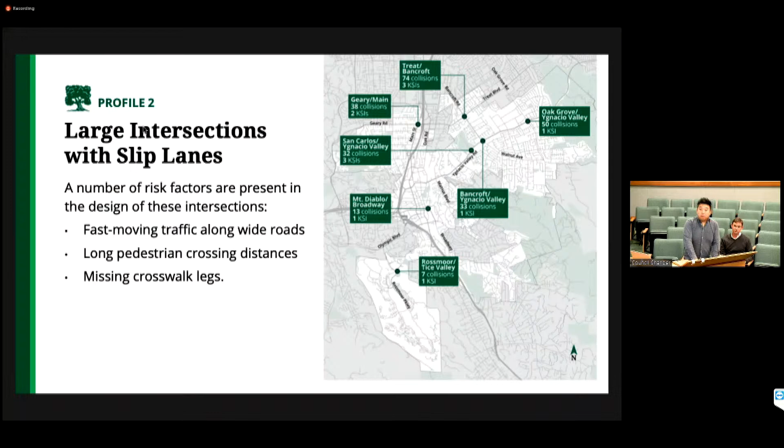With the solutions, you're really looking beyond just closing that slip lane—you're also looking at other ways to slow traffic down at these intersections, using certain ways to reduce crossing distance, break it up into multiple chunks, and also just make pedestrians more visible.

Profile number 3 is speeding along large roadways, and this is just looking at vehicular crashes. You have a lot of really wide roadways in Walnut Creek, and the wider a roadway is, the more conducive it is to a vehicle moving at higher speeds, and that can sometimes happen even despite the presence of a lower speed limit.

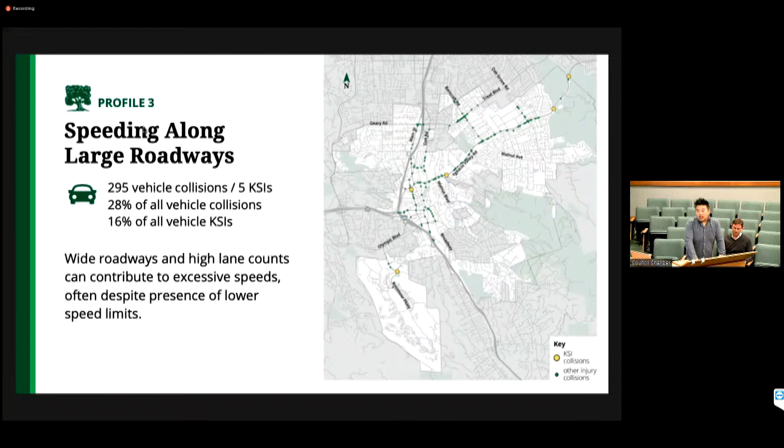When you look at roadway design, there are certain things you can do to design a roadway so that drivers intuitively understand it's a lower speed limit area—introducing features that really prioritize safety and going at the correct speed rather than maximizing throughput at all times.

Profile number 4 is large roadways around downtown. Walnut Creek has a very vibrant downtown as a regional destination, so you have a lot of vehicles, a lot of pedestrians, and a fair amount of bicyclists. When you have all of that mixing together in this small space, but you also have large roadways that look a lot like what they look like outside of downtown, you create a lot of potential for risk as all of these modes mix together.

You can see a sizable chunk of all injury collisions, especially a large chunk of pedestrian collisions, happening along these multi-lane corridors in downtown. Really, they're out of place in many respects when you have something very wide and moving very fast through a pedestrian-oriented area.

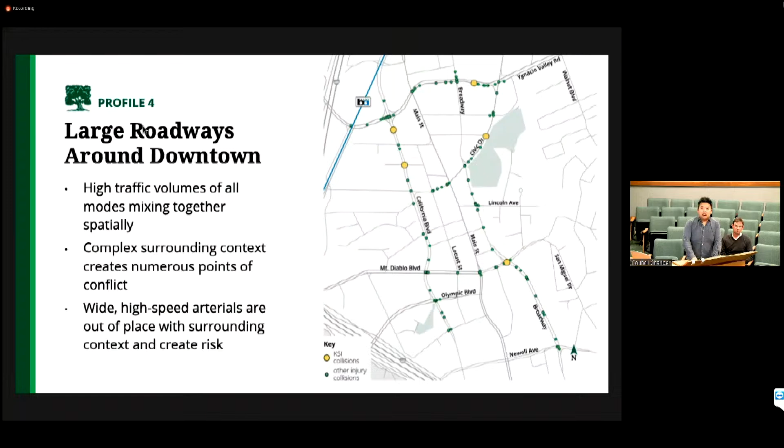These countermeasures really aim to slow traffic moving through downtown and add redundancy—again, it's about making that design more forgiving. You can see some of these have already been implemented around downtown in recent years.

Intersections with permissive left signals. We all know left turns are the most conflict-prone movement in an intersection, so when you have a permissive left, there's a lot of room for error.

People might be confused about when they have right-of-way, when they can proceed. As the city continues to grow and traffic volumes continue to increase, that's when you need to consider replacing that permissive left with a protected left.

There are obviously other ways you can really reduce risk at intersections.

Profile number 6 is red light running. You can see a pretty sizable chunk of collisions as well.

This, again, is something that's more behavioral, more enforcement and education oriented, but it can still be supplemented with certain engineering countermeasures to make the roadways more forgiving. For example, larger warning signs with fluorescent sheeting can still add some safety into the roadway.

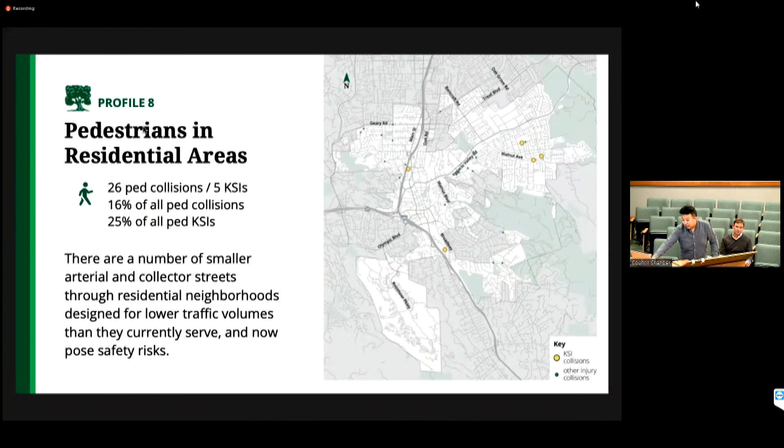For example, you might have roadways that aren't striped, crosswalks that aren't striped, or signage now obscured by plants because the right-of-way isn't kept clear of obstructions as often as needed. Maybe things need to be signalized, maybe there need to be stop signs or sidewalks. Really, we're looking systemically at these lower-trafficked streets and collector roads in residential areas that might be missing safety features that now come standard when you build something new.

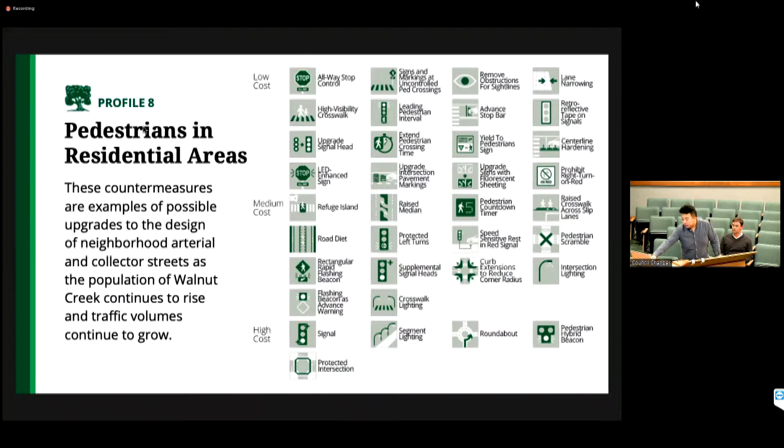We have one bicycle-exclusive profile: bicycles along our wide roadways. A lot of the same problems we discussed with speeding and large intersections apply here—there are many large roadways in Walnut Creek without appropriate bike facilities. That means either no bike facilities at all, or a Class 2 bike lane, which is just painted on with nothing separating the bicyclist from general traffic. At intersections, those bike lanes are designed so the bicyclist has to weave into traffic, creating conflicts with vehicles turning right. That traffic mixing, and having two modes moving at very different speeds without separation, is a hazard.

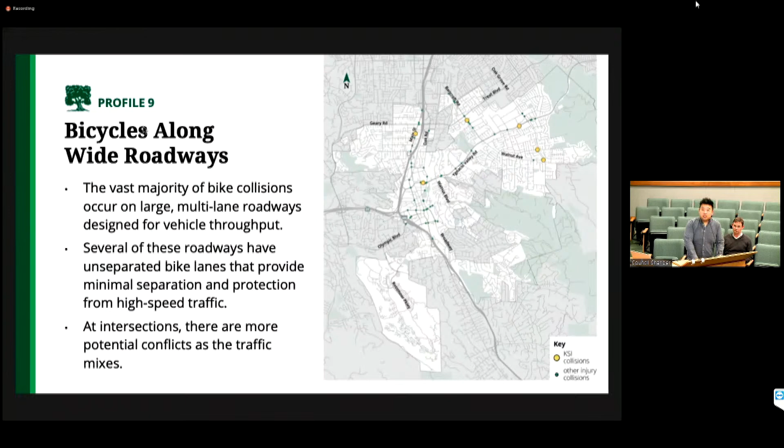The best solution here is additional and improved bike facilities, but also improvements to intersections to clearly delineate where the bike is going to be, and creating roadway design that allows traffic to go slower at the intended speed.

Finally, we decided to separate out Rossmoor as a special area for analysis, just because of the unique demographics and features of that community.

This is what we're calling right-of-way violations. In this bucket are signals and signs violations—so if someone doesn't stop for a stop sign, that's a signals and signs violation. You have vehicle right-of-way violations when one vehicle takes right-of-way when they didn't have it, pedestrian right-of-way violations when a vehicle violates a pedestrian's right-of-way, and improper turning violations. All of those we grouped into one bucket—think of it as vehicles going when it's not their right-of-way to go.

With all of these, it's a violation in the sense that one vehicle was in the wrong, but it's important to remember we're not dealing with traffic tickets here—we're dealing with injury-causing collisions. Going back to shared responsibility, it might be someone's fault for insurance purposes, but the solution is about making the design more forgiving in general. It might be someone specific's fault, but it's really about building in redundancy for the safety of all parties involved.

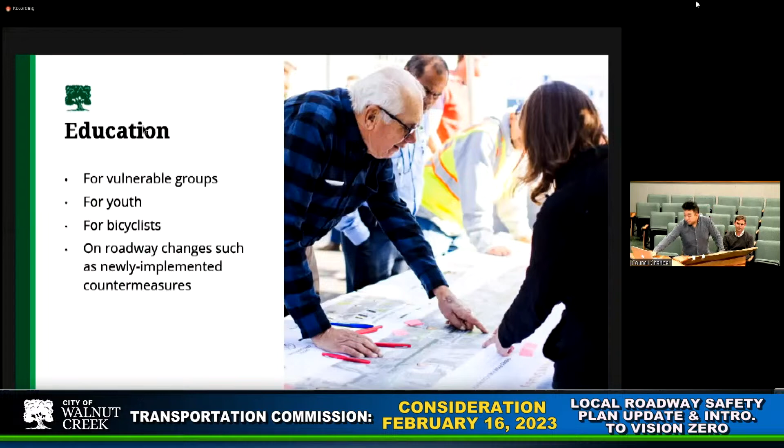Enforcement—over the course of the development of this plan, the PD has been a major stakeholder participating in our outreach and giving us feedback on our ongoing analysis and planning efforts. Enforcement can be informed by the findings of this plan, so you can target specific locations, times, or contexts for enforcement, with high visibility enforcement tied to those contexts to really drive messages home.

We've also initiated a conversation about whether automated enforcement might be appropriate. Obviously there are a lot of caveats to that, and no decision is made now, nor will be as part of this plan, but it's just an idea to explore.

Obviously, all of these need to be considered with an equity lens. So, for example, if you're talking about automated enforcement, how do you make sure that it's really for the sake of safety as opposed to punitive revenue collection?

There's policy changes to keep in mind. One of them is AB 43, which has been passed by the legislature and signed by the governor. The effects won't fully kick in until 2024, but basically it allows local jurisdictions more leeway in setting their speed limit rather than being bound by the 85th percentile.

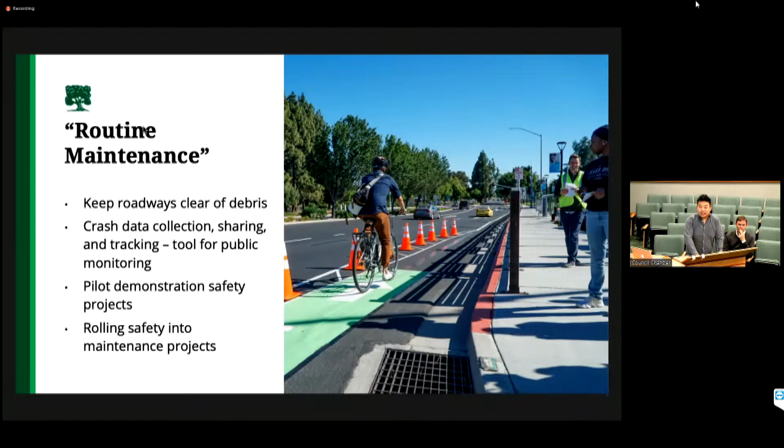And we have another opportunity to pause. Any questions from what we just heard?

Youth Member Yao: Yeah, so you mentioned education. Can you give a more detailed explanation on how you plan to educate people, especially the youth?

I think first and foremost, those slides can be seen like the library of countermeasures that you saw that accompanied each profile. So it's not committing the city to doing all of them, and it's not saying we should do all of them at all times. It's really doing them on an appropriate, as-needed, and context-sensitive basis, the same way you would put in, for example, a roadway improvement.

With that said, an example of where an education program for youth or school-age children might be a good application would be, suppose there's a safety improvement put in near a school, and you might want to have a person from the city come in and talk to the kids about, hey, what is this new crosswalk that we put in? How do we operate the beacon that comes with this crosswalk?

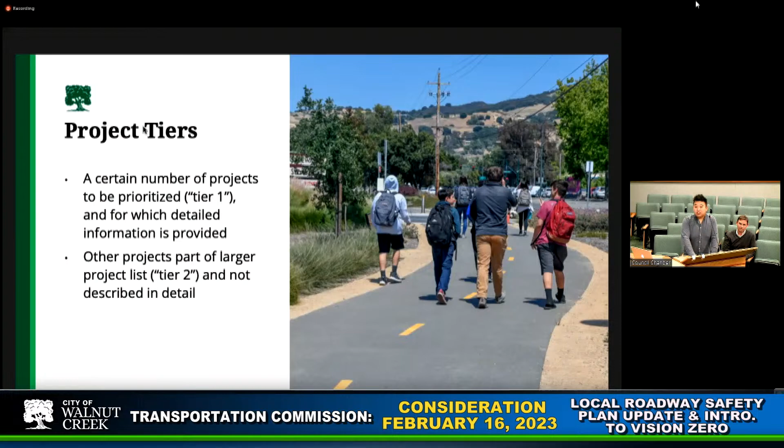So with that, I'll talk about some candidates for potential transformation into a project. The first thing is a map of intersections around the city with slip lanes, shown with dark green and light green dots. The dark green dots are from profile number 2 - intersections with slip lanes that are large, four lanes or more across on both intersecting roadways. The lighter green dots are other intersections around the city that also have slip lanes.

These are candidates for slip lane removal, but also candidates for reconfiguration, adding bulb-outs and median refuges to other parts of the intersection. So maybe you keep the slip lane, but add safety improvements elsewhere to compensate, adding missing crosswalk legs and other intersection improvements as context appropriate.

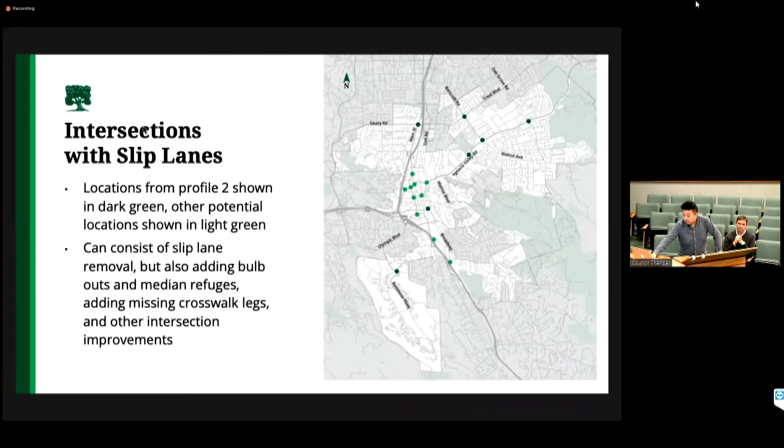The second map shows some of the largest roadways in the city outside of the downtown core area. These are your largest major corridors, where you can address issues like bikes not having proper bicycle facilities that are more protected from vehicular traffic moving at fast speeds.

That also goes to the point earlier about creating facilities that might induce more travel in other modes - if you create less stressful facilities, people might see biking or walking as a more viable option when they feel the places they'll be doing it in are safe. These are also corridors for safety enhancements to uncontrolled pedestrian crossings.

Obviously they're wide and fast moving, so these are especially places where, without a dedicated signal, a pedestrian might feel very uncomfortable to cross. These are corridors where uncontrolled pedestrian crossings are due for enhancement. That goes to the systemic nature of this process - we know not every uncontrolled crossing along these corridors will have a collision history, but we also know these are locations with safety concerns.

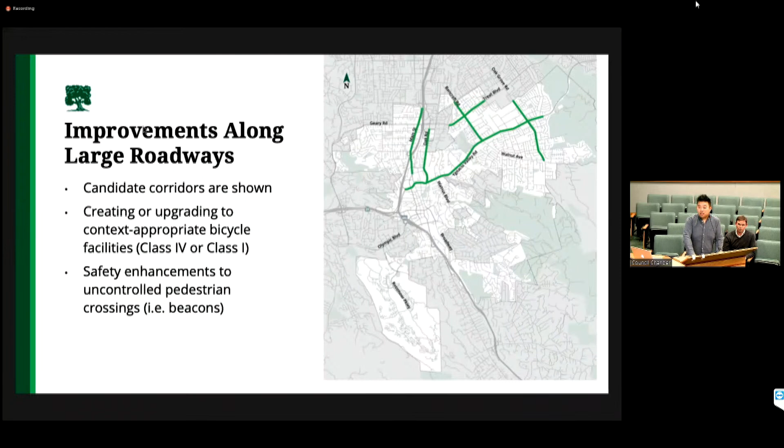Then I want to zoom in the map to just the area around downtown. These are some of the larger corridors around downtown, and what we're talking about are different options for how to reconfigure and optimize the lane configurations of these roadways.

For example, on California, it might be providing bike facilities on that very wide right-of-way that are an upgrade over what the existing Class 2s can do for bicyclists. It might be looking at North Broadway for a road diet that turns underutilized roadway capacity into something more productive.

For example, making calming traffic speeds, or potentially providing bike facilities, and also intersection improvements to make these streets function less as barriers.

If you think about some of the larger intersections in and around downtown, an intersection like Civic and Broadway, even though it's right in the heart of downtown, can seem pretty intimidating for a pedestrian to cross because of how long the crossing distance is and how many lanes of traffic you have to get across. We have several of those corridors going right through downtown, and that divides downtown into smaller areas where travel between them seems more daunting than it has to be.

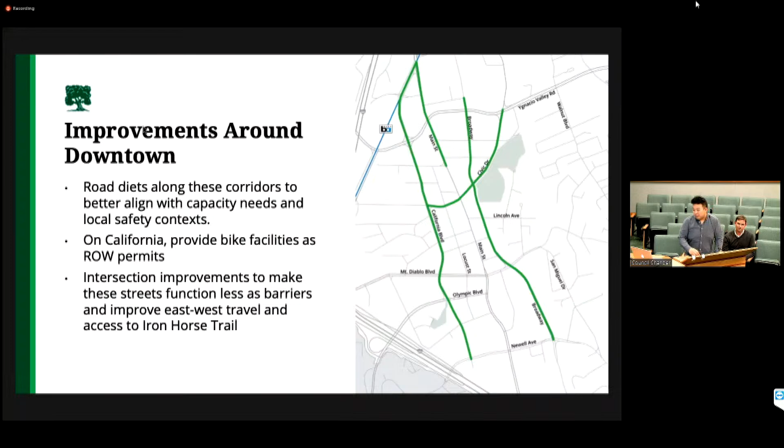So those are some of the candidate corridors in downtown for any or all of these improvements. And then finally, here are some miscellaneous improvements that more or less align with the pedestrians in residential areas profile, but are not limited to just pedestrian improvements.

So obviously there's the Newell Avenue project that the city has previously studied, and this is now also on CCTA's radar as a potential component of a wider Olympic Boulevard project that is multi-jurisdictional. There's Walnut Avenue, a section near where the CC Canal Trail crosses it, improving crossings there, both for the canal trail and other pedestrian crossings along that section. And then you have Montego right off Ignacio Valley, reconfiguring a very wide roadway that is significantly wider than the capacity it's serving.

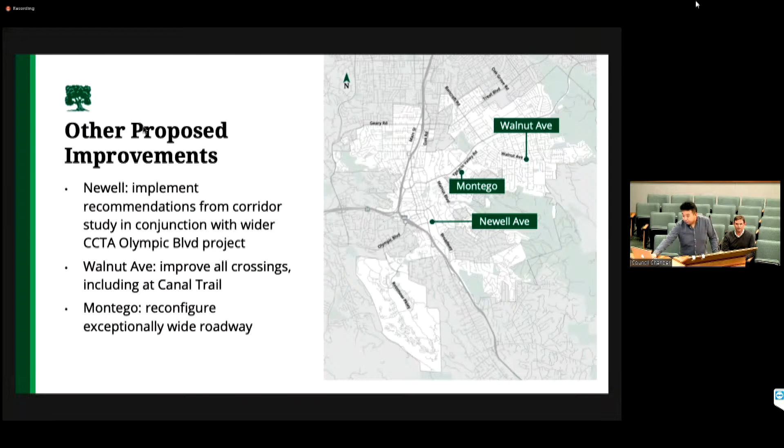And those are some of the preliminary project candidates. I'll open it up for questions to you and also to the public.

Commissioner Salcido: just an overall question. We're providing, eventually we will be providing feedback on what you've presented. Will this eventually turn into a more formal plan document, and what will that process be for adoption?

We've been bringing this document in chunks as updates. I think it's a lot of information, so the little chunks help us get better feedback, so that when we come to you with this draft local roadway safety plan, which we're hoping to bring in March, it will be the full plan containing all the previous content we've shown you, incorporating feedback from you, other stakeholders, and from tonight. Then we would be looking for a recommendation from the Transportation Commission for City Council to adopt this plan. Depending on timing and your feedback on the draft plan, we'd go to council ideally sometime in late spring, early summer.

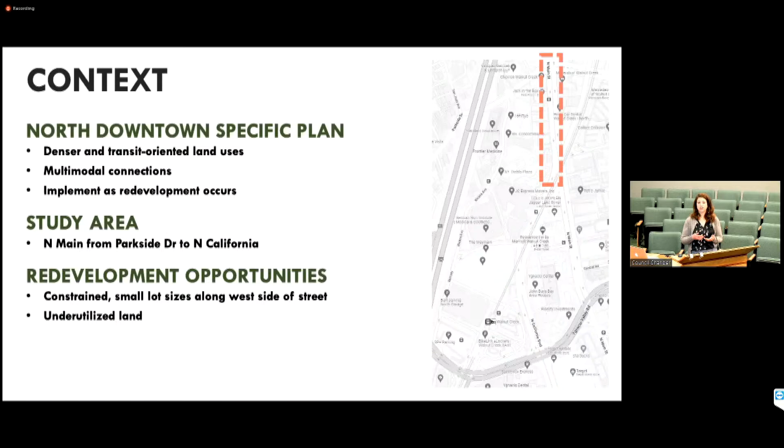So the existing cross-section: we've got 4 lanes of traffic as you come down North Main past Parkside. Once you hit the BART tracks, or where that California split happens, you've got 2 lanes that go down along North California, and 2 lanes that continue on along North Main. Right now it's anywhere between 6 and 10 feet of sidewalk, depending on which part of this segment you're on. And we have a median, except for this added split area at the North Main California split, where the BART tracks have a column in the middle of the street.

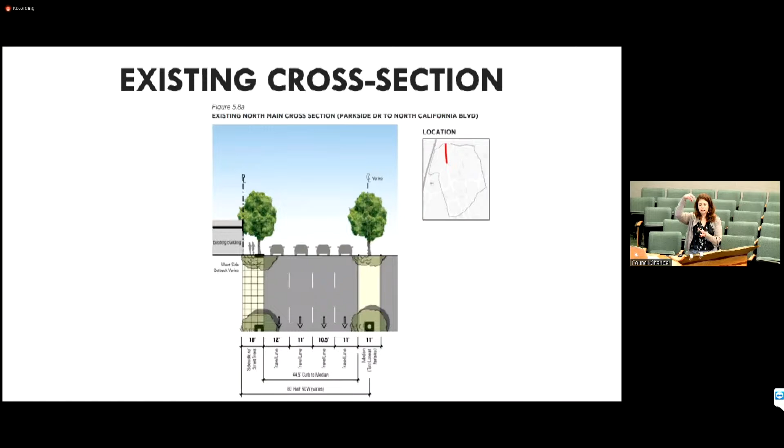Something I wanted to call out here, actually there's two things. One, we were just talking about design speed and how we can implement safety improvements as we're making improvements to the street or to the roadways. Some of these travel lane widths are actually quite wide, really supportive of faster moving vehicles. That's not to say California or North Main are residential in nature - they're not residential streets, we have a mix of different types of land uses here. But having something as wide as a lane on a freeway may not necessarily be necessary at this location.

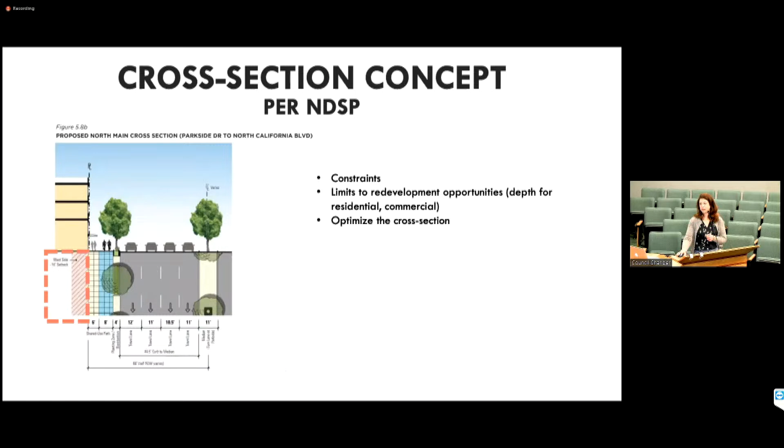So we had a consultant do a quick traffic analysis on this. Instead of the 4 lanes that I was talking about in that cross section, what if we just brought it down to 3 lanes? And what does that mean?

The findings were based on existing traffic volumes, from around the 2019-ish time period. Just to nerd out a little bit here, traditionally when doing traffic analysis you use typical conditions, and the pandemic really had a substantial impact on how traffic volumes function, or how people travel.